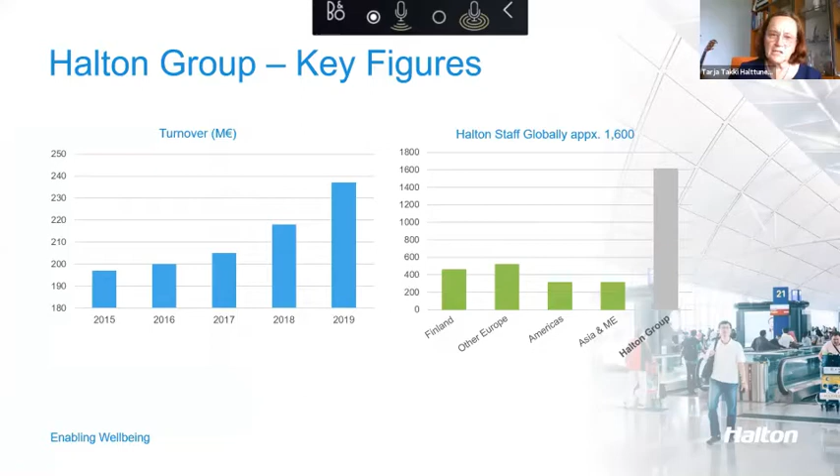Okay, well, thank you very much indeed. In fact, this book, Breathe In, is a great book, and I was so delighted. I was honored to be invited to your 50th anniversary, and you have a wonderful director here who is also a member of our board, the Turkey Finland Business Council board, Mr. Onur Çakır. So he passed the invitations to me, and I was so happy to get this book and all the photos and everything, and that great events and the rock concert by Mika.

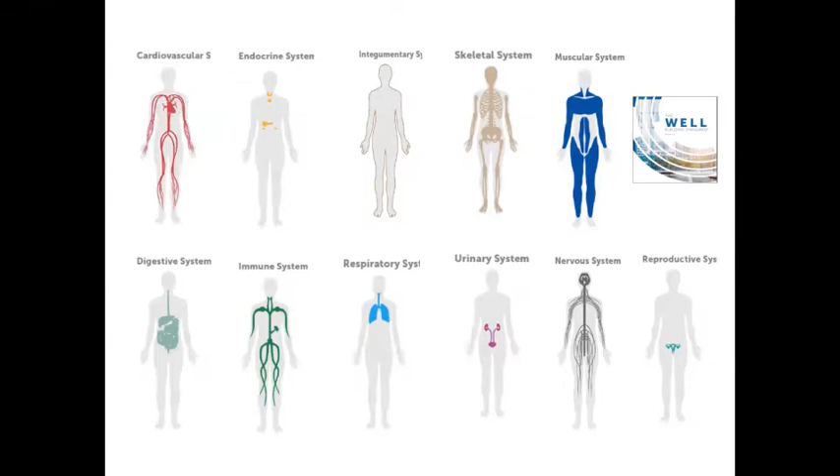For those of you who haven't looked at the WELL standard, you can download it from the web. They've basically taken each of the human circulatory system, the respiratory system, the muscular system, and talked about how we have to design indoor environments for each of those systems. Of course, COVID is addressing some of those systems - it has the most significant impact on the respiratory system, but unfortunately it seems to be having an impact on many more systems, which is what makes it such a scary time.

I'm an educator and a researcher, and I spend a lot of time doing public speaking to the design community and the building management community. So I'm always trying to turn this into prioritized guidelines - what do we have to do, and in what order?

If you look at human health response indoors, probably the most critical thing we can do is do a better job of delivering fresh air. Beyond that is eliminating toxicity in materials, because indoor air quality is a function of what we bring into or have in the building. We have to now start treating water as a design material, because water can bring in toxicity or create Legionella.

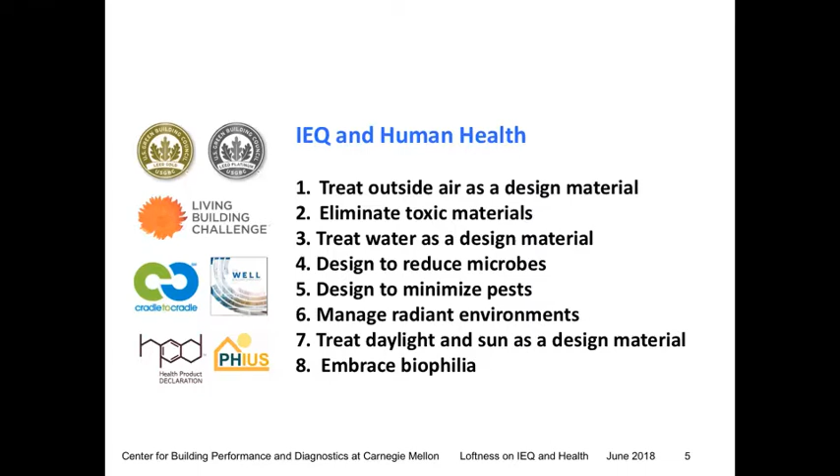We're looking at ways to reduce microbes, which COVID is one of the microbial concerns, designing to minimize pests, managing radiant environments, and then treating daylight and sun as a design material, because it's actually a healing and sterilization opportunity, and embracing biophilia. I'll end with that at the end of the talk.

This is the most important thing we have to do, and it's fitting that Halton is the sponsor for this talk, because delivering outside air to the occupants is critical. It means we have to design our ventilation systems to be effective. As an American who watches American mechanical solutions show up all over the world, variable air volume systems, the whole idea of delivering cooling and breathing air together is a terrible idea. You have to deliver breathing air separate from cooling.

Ideally you do water-based cooling, because it's a far more energy efficient and quieter solution. But if you're going to do air-based cooling, do a dual duct system and deliver your breathing air independently, because less than 10% of the air we blow around buildings in a VAV system is breathing air - 90% of it is just cooling air, just recirculated air, and it's fraught with problems, even if we do ultraviolet and other kinds of filtration.

We're going to have to increase the amount of outside air. We really should be using economizers with heat recovery, and increase it as much as we can. If it's a beautiful day today in Istanbul, we should be increasing the amount of fresh air we're bringing in, instead of bringing in the same 10% and then trying to heat it, cool it, filter it, and dehumidify it.

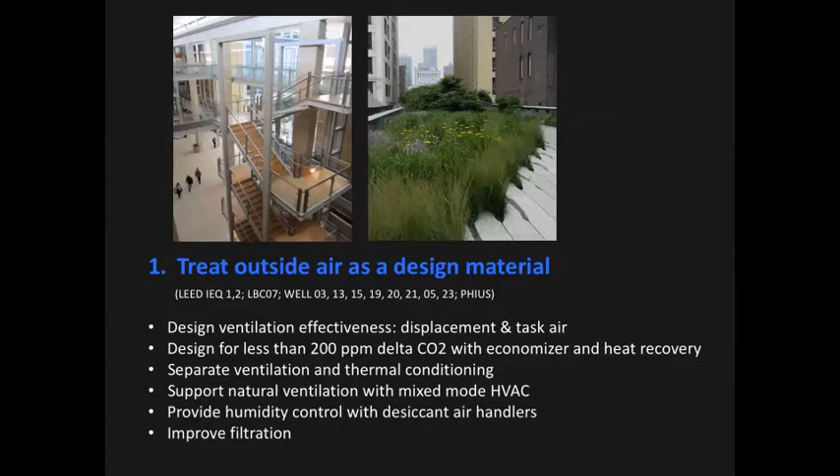Of course, air comes with problems. We're going to have to filter it, and we're going to have to deal with the humidity issues. There is research that really argues for why we need to increase the amount of outside air to make sure we deliver it effectively. These are the kinds of studies that our research team at Carnegie Mellon have been focusing on, finding the medical and scientific research that links better buildings to better health outcomes.

This is a study of colds in offices, and what they found is that there was a 6.8% reduction in cold incidences in offices that had CO2 differential less than 100 parts per million higher than outside. In other words, the closer you can get your indoor CO2 to outdoor CO2, the better the indication of ventilation quality.

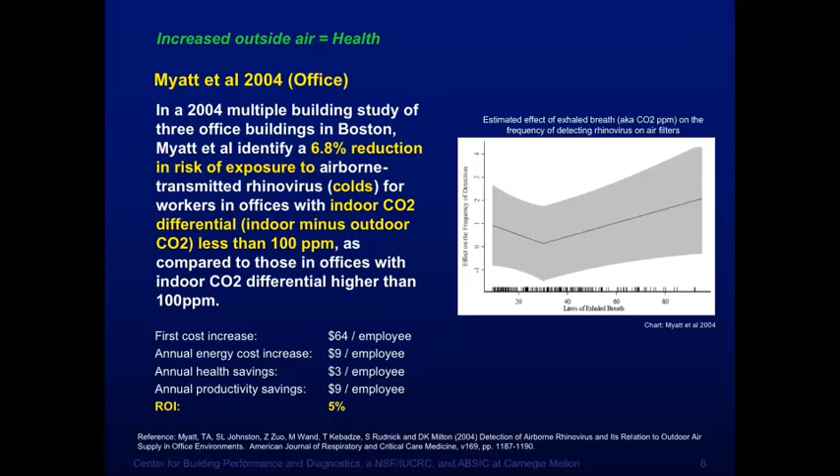Another study in Sweden looked at asthma, and found a huge 69% reduction in 2-year incidences of asthma among school children when they were given a displacement ventilation system, which is a far more effective delivery of fresh air with increased fresh air supply compared to the traditional ceiling-based VAV system. Classroom studies in Scandinavia have consistently shown that the quality of the mechanical system and the delivery of fresh air is extremely important. A 69% reduction in asthma in school children is a huge contribution to the health of the next generation.

The second big issue for me is to keep windows operable. Now, I know there's a reason why schools in America have been slowly but surely replacing old windows with new sealed windows. They do that because they're worried about security, outdoor air quality, and outdoor noise. But in reality, the outdoor air quality is almost always better than the indoor air quality.

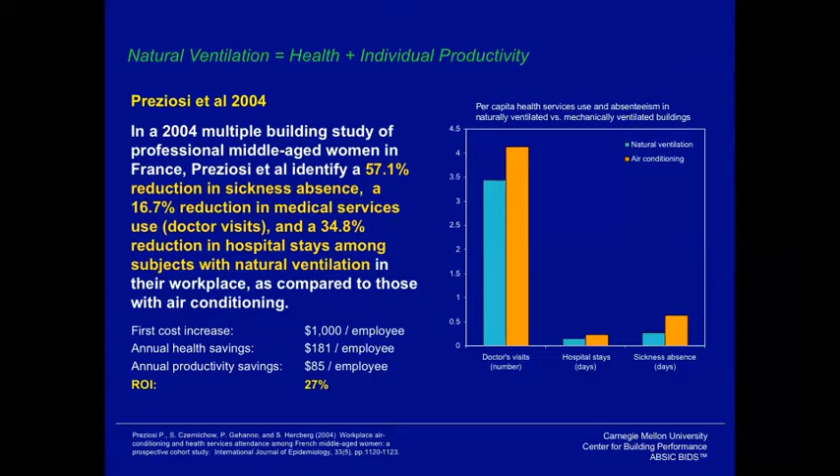Again, the research is with us. A study in France by Preziosi found a 57% reduction in absenteeism, a 16% reduction in doctor visits, and a 35% reduction in hospital length of stay among female workers in office buildings with windows that opened, compared to female workers in office buildings with mechanical systems. A lot of it has to do with concerns that could arise from a mechanical system that's inadequately maintained or badly filtered. But there's something about outside air that we haven't quite teased out that we need to re-embrace.

The next issue is to eliminate toxic materials. Nothing could be more important, after increasing the breathing air content, than making sure that what we put inside buildings is not toxic. There is, in Europe, a move to establish the precautionary principle, which basically says if we don't know whether it's healthy, we probably should not use it. If we know it's healthy, we can go ahead and use it.

In America, with the Living Building Challenge, they've created something called the Red List, a series of products they say don't put in buildings—they're fraught with health problems, they're endocrine disruptors. There are also health product declarations, so now we're starting to see labels on materials and products that declare they've actually been tested to be healthy. This has to do with our respiratory system, our eyes, our skin.

There are so many elements around us that actually diminish our health over time. The biggest ones being adhesives and sealants, paints and coatings, flooring materials, composite woods—because many composite woods are created with formaldehyde and creosote—and fabrics, because of the flame retardants put into them.

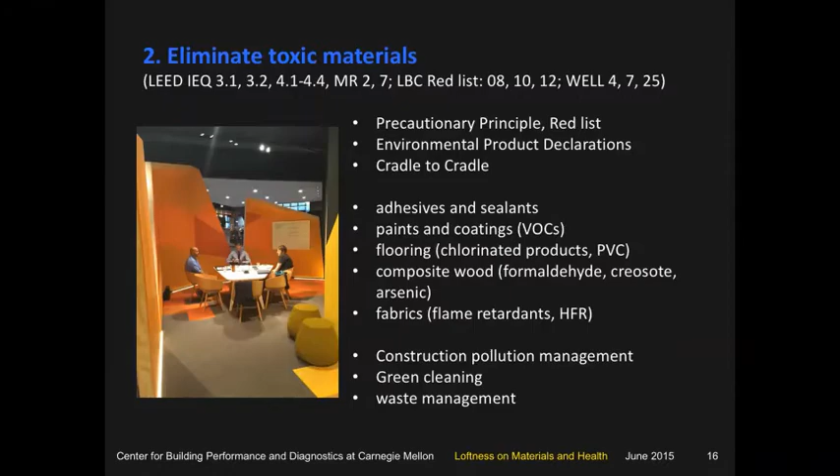And then over time, we add pollutants. We have construction pollution, non-green cleaning pollution, and other types of waste management in buildings. The research is growing in this area, in this case regarding formaldehyde in composite wood products.

A study done in Australia found a 60% reduction in the prevalence of asthma among children in households that had formaldehyde-free composite wood products. These are the products in your kitchen cupboards, in your couch frames, and we have choices when we go shopping—to buy composite wood made with formaldehyde or other toxic bonding agents, or to make sure we only buy products that are formaldehyde-free.

And of course, sometimes they replace formaldehyde with other toxins. So what you're really looking for are environmental product declarations that basically say everything in this chair is a healthy product. Many manufacturers are beginning to pursue labels showing the entire product is healthy and has been tested. This shows a 60% reduction in asthma for kids in households where parents have chosen formaldehyde-free composite wood products—again, a huge impact.

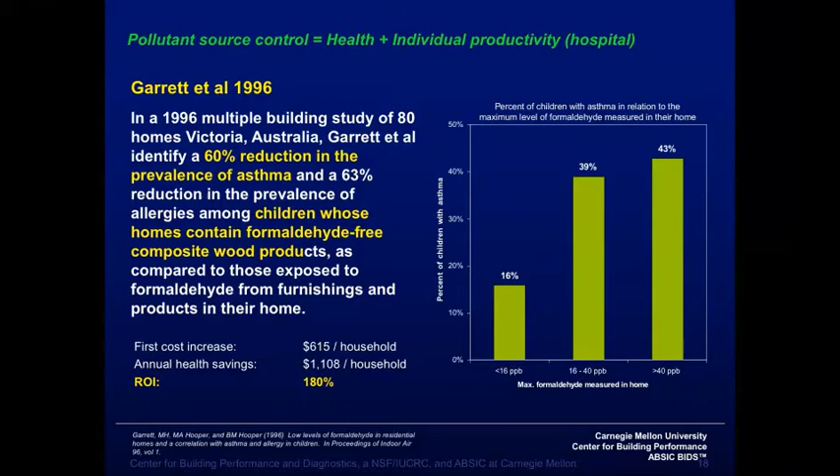A very different study on productivity and indoor air comes from the Technical University of Denmark, one of the leading research groups on indoor air—actually the founder, Ole Fanger, of the thermal comfort standards and air quality standards we all work with around the world. In this study, Wargocki identified a 6.5% improvement in typing performance and almost a 50% reduction in sick building symptoms when indoor air from old carpet was taken out of the airstream.

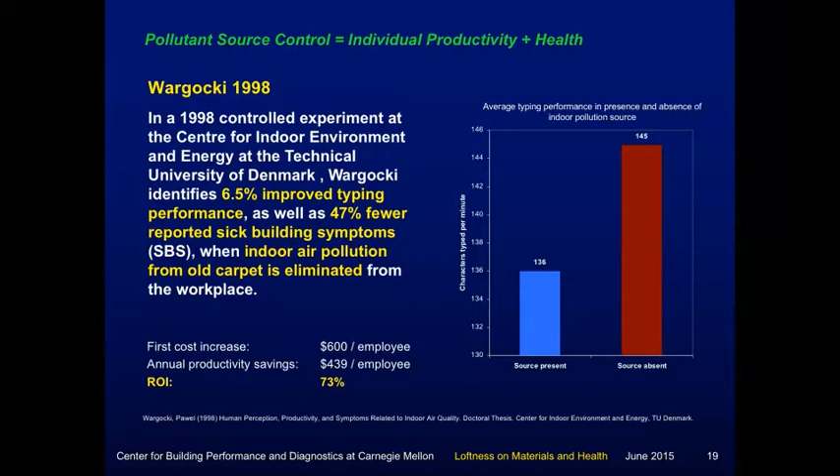It was a very unusual test where they introduced actually dirty carpet into the airstream, hidden from the occupants, and measured performance on a series of repetitive typing-related tasks. They found a compromised performance, and the occupants also sensed that the indoor air was compromised. They never found out exactly what toxin was in the old carpet—they only identified that when it was put in the airstream, it compromised health and performance.

As I mentioned, the Living Building Challenge has established a Red List. As you can imagine, manufacturers are not thrilled to have independent bodies like Delos, with the WELL standard, and the Living Building Challenge, creating a Declare label, because it makes it tougher for them to manufacture products. But we have to be partners in making sure the manufacturing community eliminates the toxic components and replaces them with things known to be healthy.

Another group that's been extremely valuable in pushing a new generation of products is the Cradle to Cradle initiative—this is Bill McDonough and Michael Braungart's work. They've published the books Cradle to Cradle and now Upcycle, and they've created a public repository of high-performance materials and products for all of us designers and engineers.

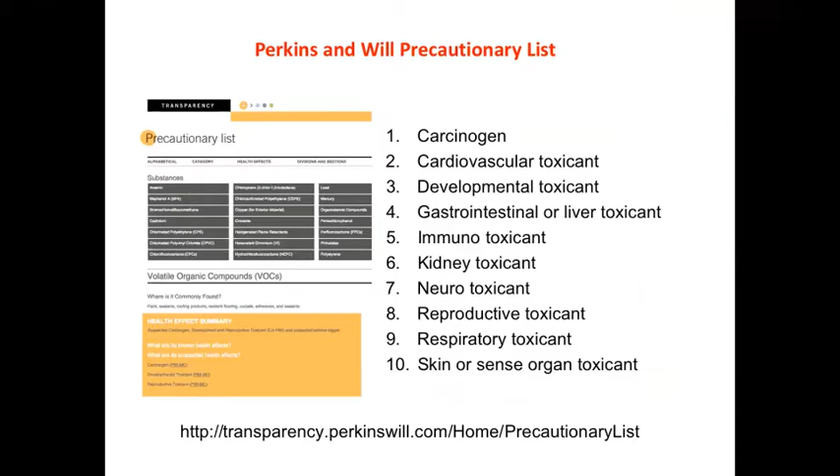The design community, like Perkins and Will, one of the largest firms in the US, has created their own precautionary list of things they are eliminating, to ensure they've done the best professional job, and also to be more competitive because people know they care and are on top of what are healthy products. We are looking for things that don't irritate the skin, that don't outgas toxins, that don't degenerate into respirable fibers.

All of you remember the asbestos generation, and we may now be generating other forms of asbestos which we have to be on top of. We need materials that don't create fire hazards, don't foster mold or mildew, or transfer viral infections, and that also have low embodied energy in the building and the materials themselves.

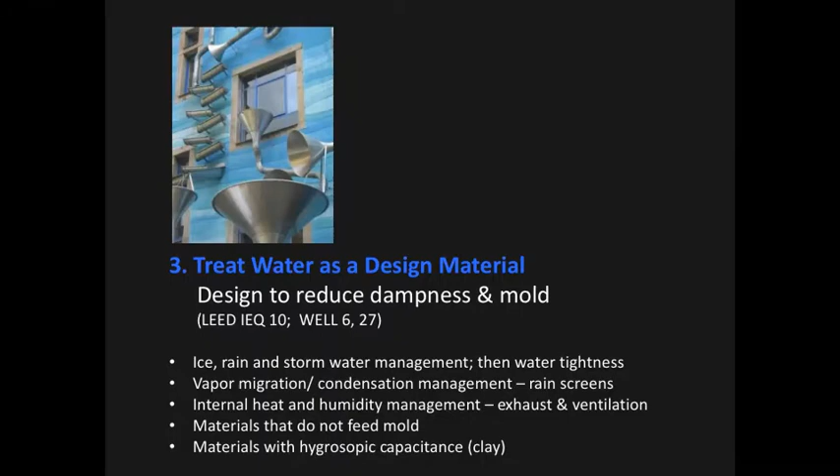The third thing we need to do for indoor environments and health is start treating water as a design material. A lot of our health concerns, especially in rainy areas and areas with lots of air conditioning, relate to mold. When we super cool indoor environments and generate humidity, we often get condensation on surfaces, and where there's condensation you'll find mold growth, especially if the air has adequate humidity to support it. Mold has a significant correlation to both asthma and respiratory concerns. So we really want to start treating water as a design material and recognize that humidity and rain are an integral part of our indoor design portfolio.

This is Jack Spengler, one of the leading researchers at Harvard University's School of Public Health. He spends quite a bit of time out in buildings trying to understand both what causes mold and what impacts it has on human health. Here you can see what happens in a flood.

Unfortunately, drywall, which we use extensively, is a pretty good mold supporter—it lives on the paper coating on drywall. It turns out that plaster, literally original clay plaster, is hygroscopic, whereas drywall is hydrophobic. With clay plaster, a lot of this problem would not have happened. So maybe we need to rethink and re-embrace plaster.

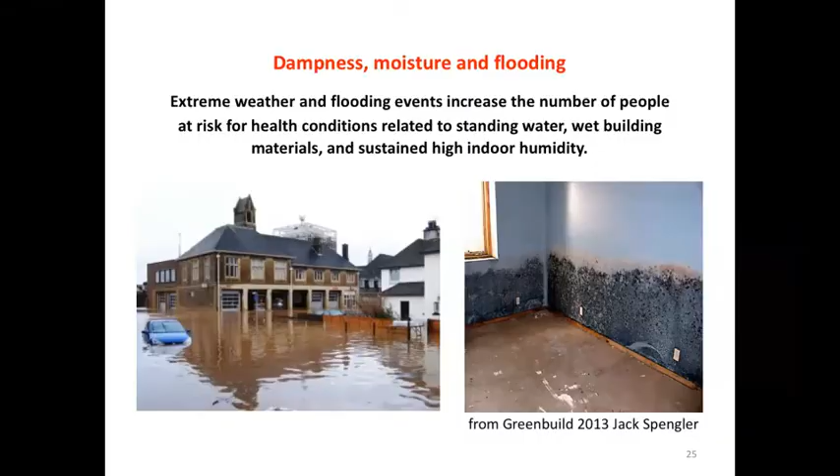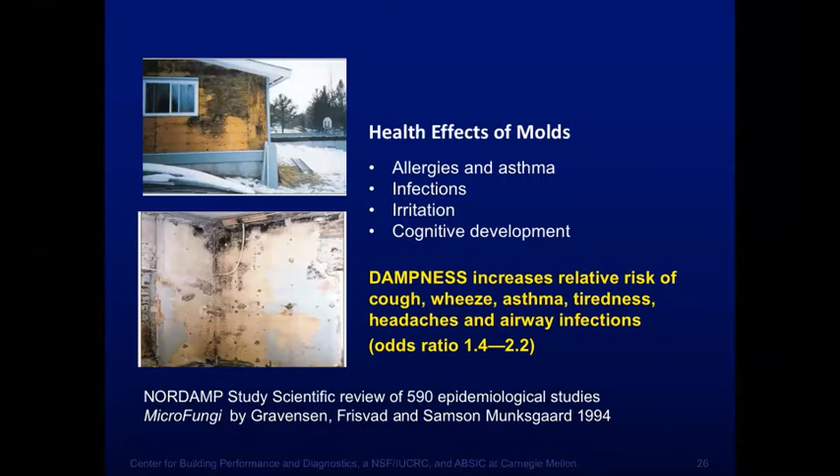As I mentioned, mold has a direct correlation with allergies and asthma. It's also strongly correlated to infections and to cognitive development. The work going on in mold research around the world is making it clear that we have got to treat water as a design material. Here's just a stretch of research around the world on this.

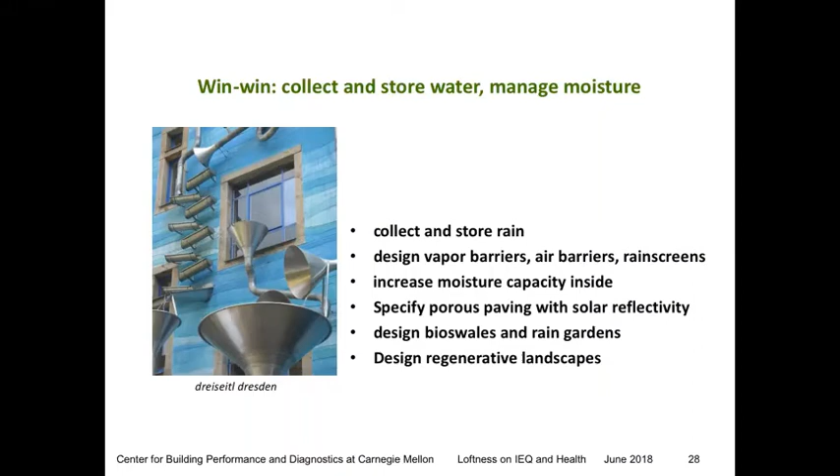It's a win-win for those of us in the design community if we start to treat rain and humidity as a positive thing. We collect and store our rain, design vapor barriers independently of air barriers, use rain screens, increase moisture capacity with hygroscopic materials, specify porous paving, design rain gardens, and design regenerative landscapes. All of this is actually a very rich arena for us in the design community if we start treating water as a design material. This is what you start to see.

This is Portland on the top slide—those are all rain gardens. They've turned their sidewalk into a huge repository for heavy rain. In a deluge, the reason for those little slots in the concrete is that without them, water on the pavement would just pool there. But with those slots, it goes into this green bed, which is very deep and has significant design capacity to hold rainwater and then slowly leach it back into the aquifer.

Pervious paving versus impervious paving—all of this is well within our keeping. At this point, cities in Europe are, in many cases, as much as 85% hard impervious surface. Between the roofs, the streets, the sidewalks, the parking lots, 85% of our cities are solid. No wonder we're dealing with water challenges.

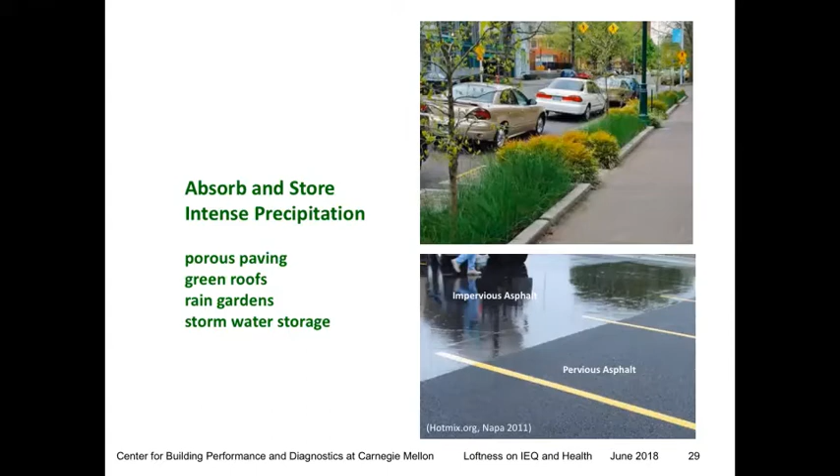This is the work of Herbert Dreiseitl, a German water designer—the leading water designer, truthfully, in the world, doing projects all over the world. He basically says we can design landscapes that will absolutely absorb a deluge and respond to drought. This is just a side yard in a European housing community, and it's a play area for children. It's exploratory, and yet it can handle the worst that nature can throw at it.

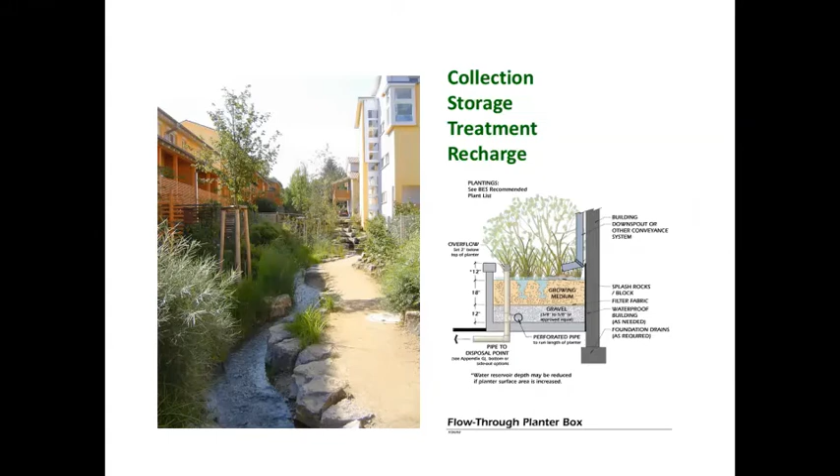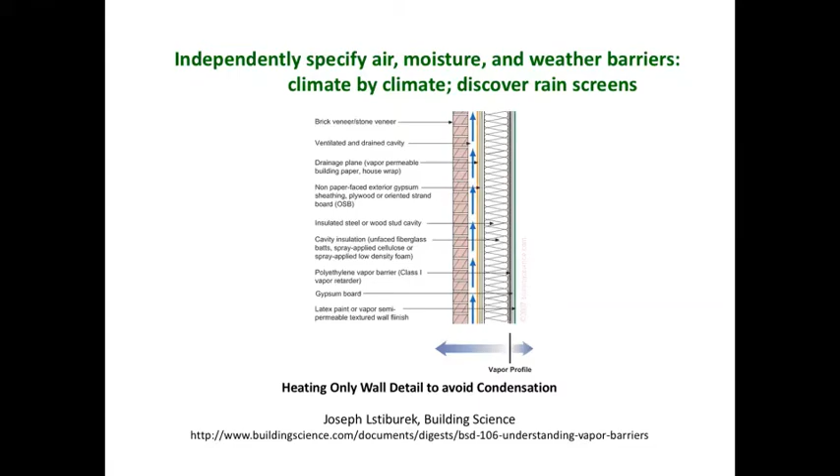It's not easy to design for hygroscopic and moisture migration in walls. We have a real challenge, and I actually don't know how to teach wall design. It gets harder rather than easier, just trying to deal with where we should actually have the vapor plane, and every climate is different. So we really have to spend time learning and testing different wall constructions for moisture migration.

Rain screens are magical. If you haven't been designing with rain screens, I fundamentally believe all future buildings should have a full layer that just deals with the brunt of the sun and the deluge rain, and then a vent space behind it. These are breathing walls—Renzo Piano has been one of the earliest adopters of rain screen. Now many architects are designing with rain screens, and projects all over the world use them. They age beautifully because these facades breathe. They're not sealed or silicone caulked, and they can go through expansion and contraction. They can take the deluge, driving rain, and then they dry out, and the space behind it is completely separate from the actual wall of our space.

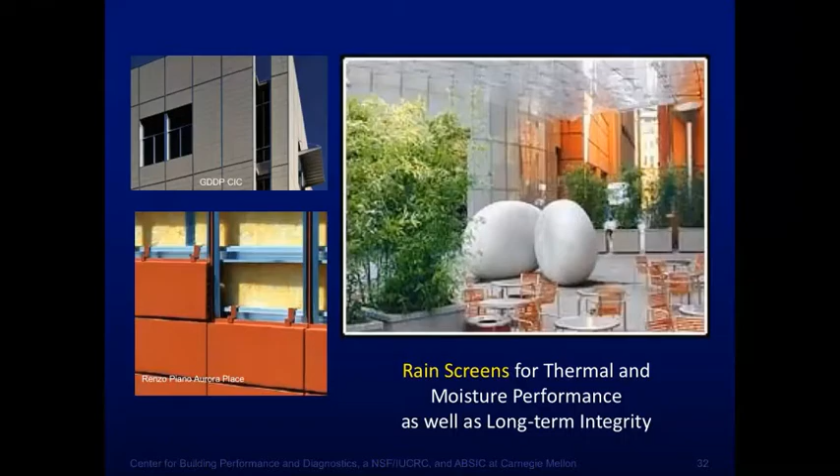Designing to minimize pests and to reduce microbes are two things that go hand in hand. Minimizing pests, we could start by redesigning our front doors. To reduce pests, we can do integrated pest management. Designing to reduce microbes has a lot to do with learning ways to clean and using hands-free design.

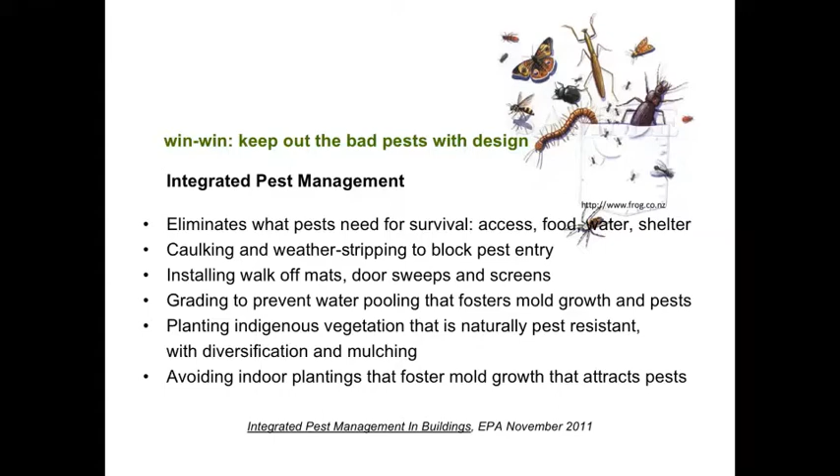Integrated pest management is an entire menu of activities. Probably the most critical activity is catching things on their way in. You actually need 3 layers in your front door: a scraper that picks up heavy dirt, a wiper that allows you to get water off of it, and a finisher. So you're literally designing for 3 layers of cleanup on everyone's feet.

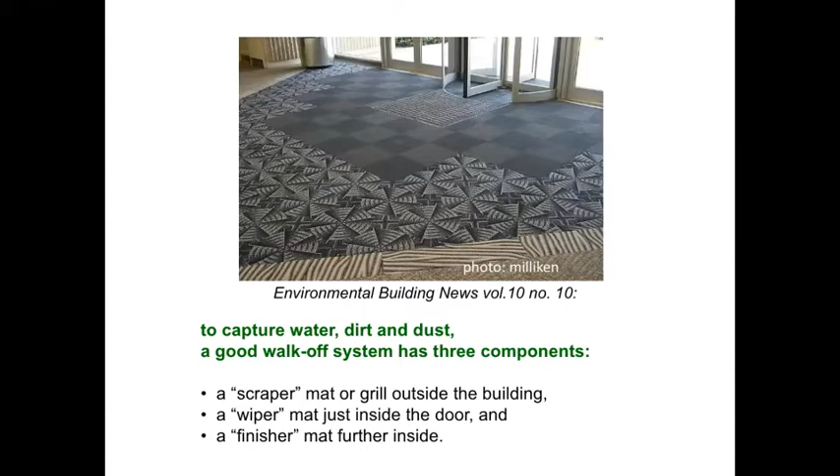Many Asian cultures have people take their shoes off as they enter the building, and it may actually be critical for human health for all of us to take our shoes off when we enter buildings. Not a very Western activity, or certainly not a very American one, but something I think we're all beginning to realize is important.

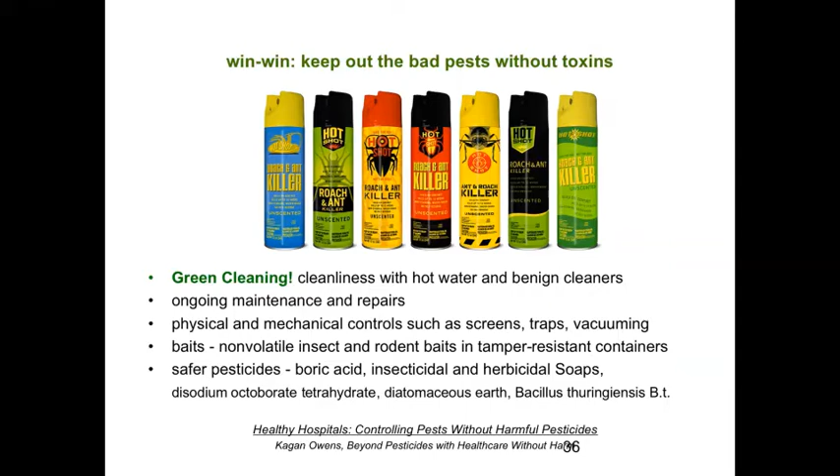Cleaning - there are so many toxic materials out there, used for pest management as well as things to clean surfaces. In the US, over 75% of households and businesses use all kinds of toxins.

Jack Spengler has been going into hospitals and taking everything out of their cleaning cupboard. He says a lot of the stuff in there is dated from 1994, meaning it's been in that cupboard for 25 or 30 years, or even longer. Most of it is filled with some of the most toxic things, and this is in hospitals. He'll take everything out of the cupboard, identify the 3 things in the entire suite that you can actually use, and say everything else has to be disposed of appropriately. He says it's so problematic what we're doing in cleaning our buildings.

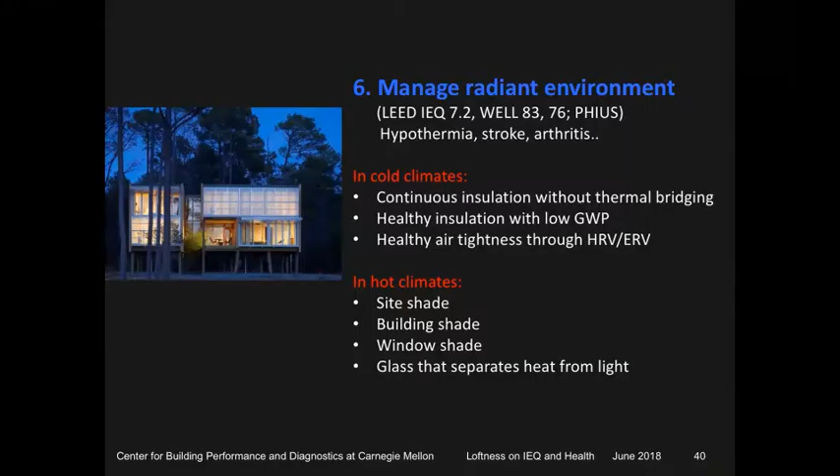Managing the radiant environment is more of a cold climate problem, although because we are beginning to super air condition in hot climates, it's becoming a hot climate problem too. Let me briefly talk about the passive house. It needs to be absolutely climate appropriate - you should not be doing a European or Scandinavian passive house in Turkey. You should be dealing with passive house solutions suited to that climate.

If we can design airtight and well-insulated building envelopes, we can guarantee that the interior surfaces are at a uniform temperature, different from the outside surfaces. If we don't do that, what we end up with is called thermal bridging.

This is the Wave building in Chicago by Jeanne Gang. I know for a fact that the original proposal by Jeanne Gang was to introduce thermal breaks, shown on the bottom right, from a company called Schöck out of Germany. They basically take concrete that's exposed inside the building and break it. We always cantilever our floor slabs out to become balconies, but unfortunately, in that cantilever, we've created a thermal bridge.

If I air condition my apartment and there's moisture in the apartment, I'll end up having condensation on the inner walls. So it's very important to break the connection between the indoor and outdoor environment and make it airtight. These thermal breaks are critical to doing that.

Unfortunately, it was a $1 million upcharge for the Wave building. The developer said no, I'm not spending that $1 million, so they did not install thermal breaks. Today, when you take a thermographic photograph of the Wave building, you'll see thermal bridging rampant, because all of those concrete waves are interior floor slabs that have been penetrated through the facade and taken into the outdoors.

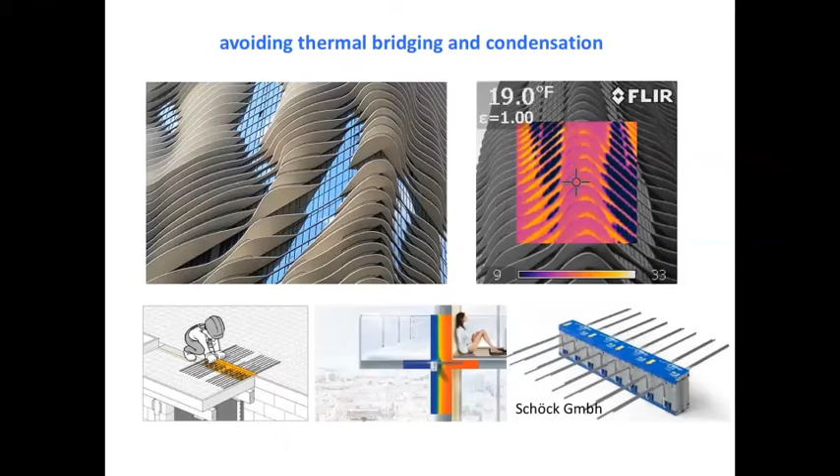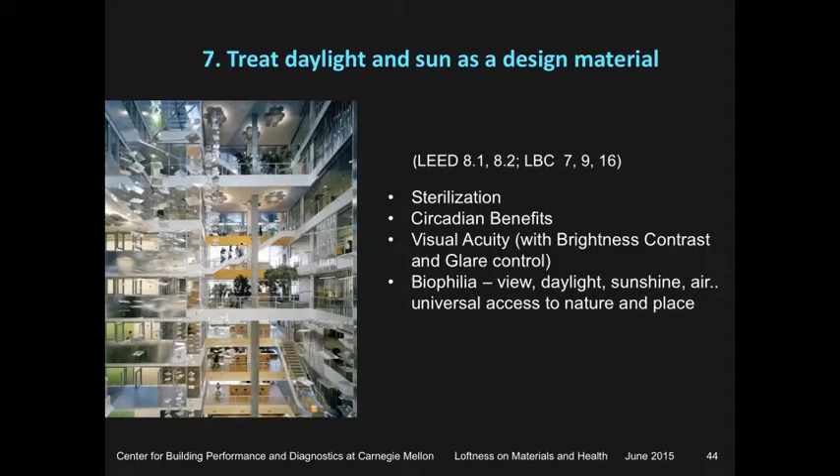We really need to design to break thermal bridge. Treat daylight and sun as a material. Daylight and sunshine are sterilizers. They have significant circadian benefits. They also provide people with views and biophilic content. So daylight is a pretty magical thing. There is research on this, looking at length of stay in hospitals.

If any of you end up in a hospital, please ask for an eastern or a southeastern room if possible, because it turns out that length of stay is dramatically reduced for people who are in the southeast versus those who are in the northwest. The amount of pain medication is reduced. The nurse calls are reduced. Something about early morning sunshine is important to our recovery.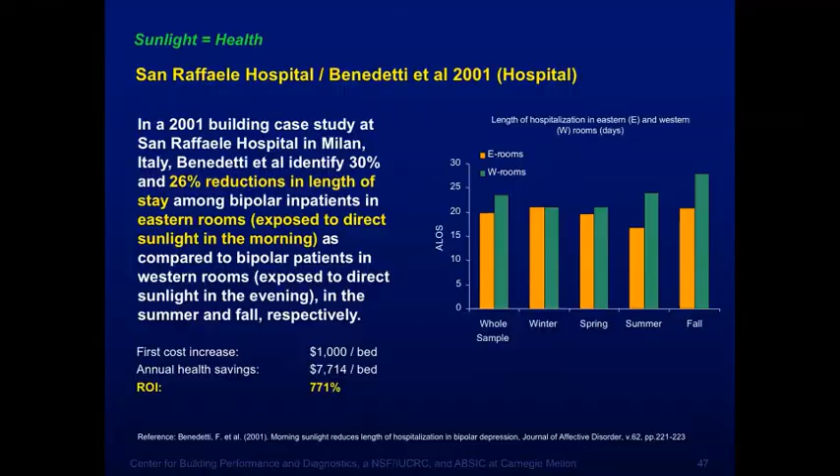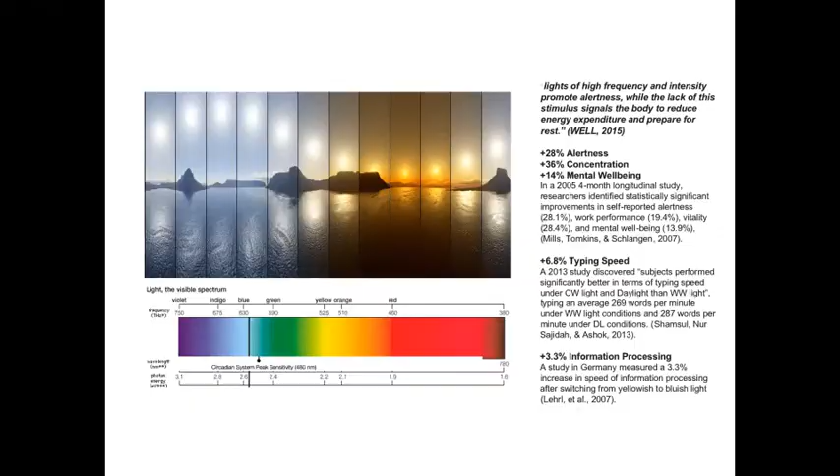The research on circadian light is growing. It turns out that the blue light we're used to from daylight in the morning creates serotonin, which suppresses melatonin, and the red light we're used to outdoors in the afternoon creates melatonin, which helps us fall asleep. If we don't get the blue and red content every day by spending time outdoors, you end up losing your sleep. Research is showing that if children are not exposed to early morning light, they will fall asleep 30 minutes to an hour later than their peers who do get exposed to early morning light, and then it will be hard to get them up the next morning. It will be hard for them to learn the next day. So there's some very good research, this by the Lighting Research Center at RPI.

And then lastly, biophilia. Once we start to embrace light and sunshine and natural ventilation, we also get all the other contents that are very important: the sounds of nature, the sensory quality of nature, the community, listening to community and children playing, the ability to increase our access to the natural environment and creating good natural environments, which we can do if we do rain gardens and regenerative landscapes, so that kids can run indoors and outdoors, and those of us now trapped with COVID inside can directly access and view beautiful outdoor spaces.

There's good research that's growing on the value of biophilia. You can download the 14 patterns of biophilia from Terrapin, and they will give you the research. In this case, there's 6 to 7% faster average handling time for call center workers when they have seated views of nature, compared to those workers who are in cubicles without any view at all. And that's a lot, 6 to 7% straight increases in productivity for call centers. It actually will justify the thinner building and the access to windows for call center employees, even though they're not very well paid in the US. You would actually make money if you would design more humane environments for your call center workers.

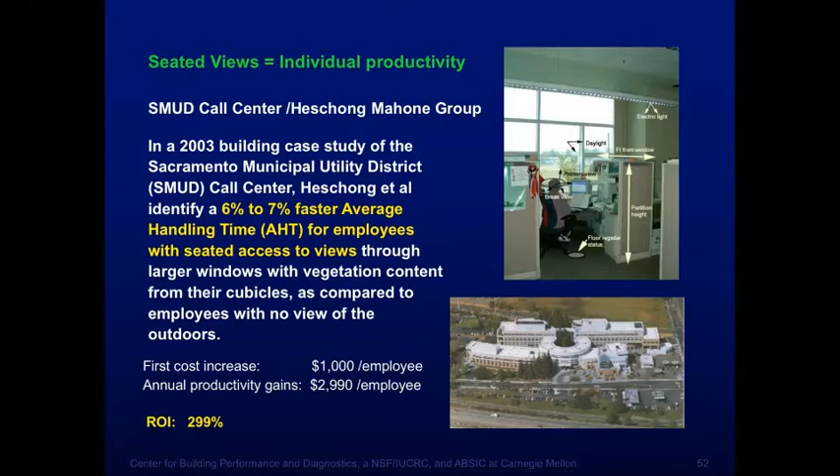For children, it turns out that providing outdoor learning environments has a significant impact on their performance at standardized tests, and making those environments actually rich with diverse natural content makes them perform the best.

So this is where I work, although not right now. In fact, it probably looks pretty clean because no one has been in this building for the last three months. This is the Intelligent Workplace at Carnegie Mellon University, where I have the privilege of working for the last 20-some years since I stepped down as head of the School of Architecture, or 15 years. And it's a wonderful daylit, naturally ventilated work environment that's very low energy and very high indoor quality. Thank you so much.

Am I? Vivian, thank you so much. That was most impressive. Oh my goodness. And you are right on time, right on time. That was breathtakingly beautiful, your presentation, and an eye-opener. I'm sure we've got, by the way, now 119 participants, okay? We probably hit close to maybe over 150, because right now it's 120, actually, exactly. So this is a great turnout, and I'm sure everybody is delighted and excited about what you've been telling.

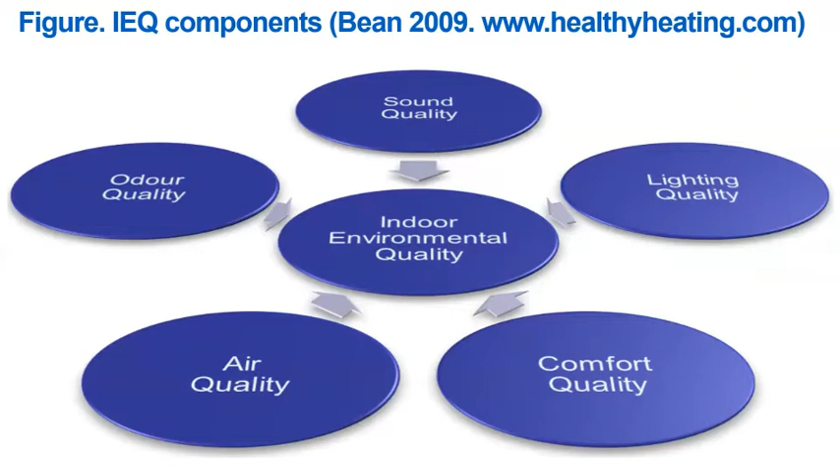So the title of my presentation today is Impacts of Indoor Environment and Air Quality on Human Health and Performance. This figure shows indoor environmental quality components published in 2009, including sound quality, lighting quality, comfort quality, air quality, and odor quality. Later, in 2019, Mujeebu published this figure. As we notice, in addition to air quality, sound quality, odor, lighting comfort, and thermal comfort, there are also factors like water quality, vibration, electromagnetic radiation, hygiene, microorganisms, and ergonomics. So all those factors affect indoor environment quality. In my presentation, I concentrate on indoor air quality.

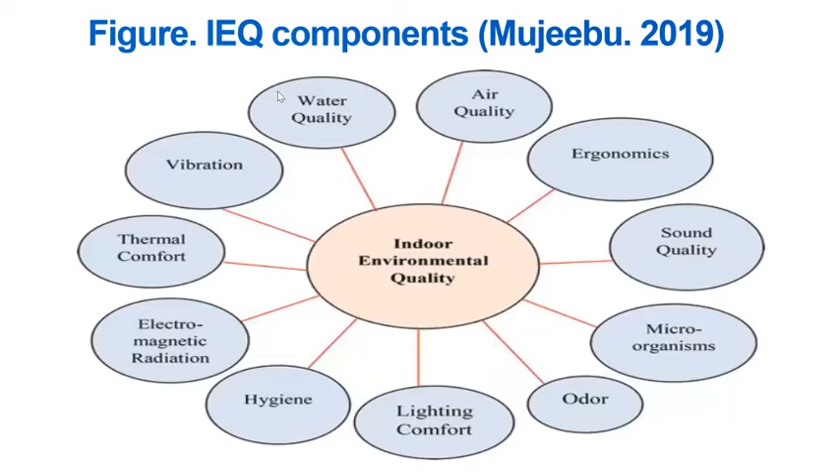I list here some facts about why indoor air quality is so important. Each day we consume on average 10,800 liters of air, and we spend about 90%, even more, of our time indoors. It's published that air pollution causes globally 7 million deaths each year, so it's a huge amount. Indoor air is on average 2 to 5 times as polluted as outdoor air—in some houses, even 100 times as polluted.

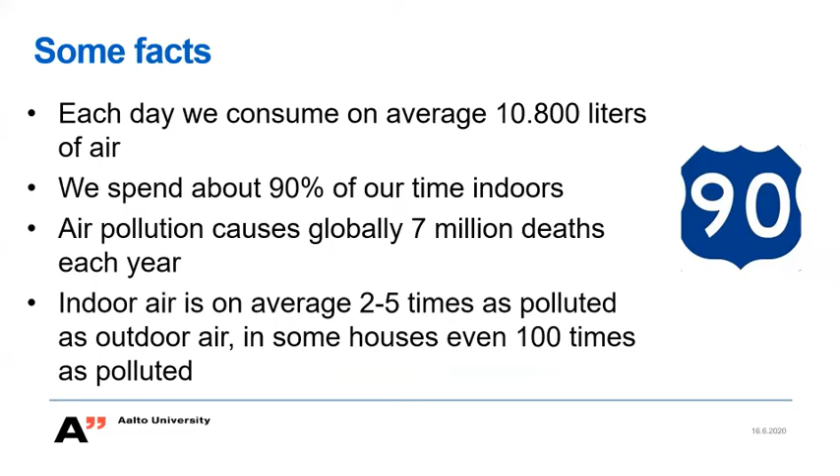I would like to start with this short video. Hopefully you can hear this voice.

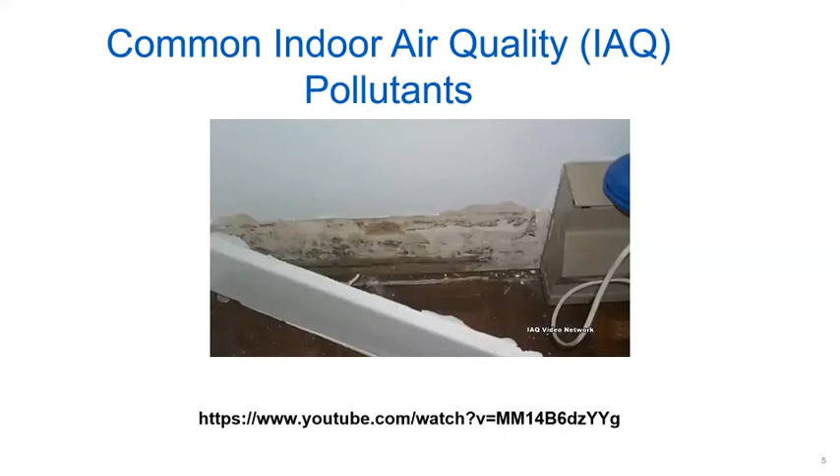In today's world, most people spend the majority of their time indoors—whether at home, school, or at the office. Some experts estimate many of us are indoors up to 90% of the time. This makes the quality of the air we breathe indoors all that much more important. In many homes and buildings, there are numerous potential pollutants that can cause health concerns or even result in various illnesses. They include the following: Mold—in buildings that have suffered water damage or elevated humidity levels, mold can begin to grow in as short as 24 to 48 hours. Mold can cause respiratory issues, allergies, infections, trigger asthma in some people, and expose people to mycotoxins. Bacteria—many types of bacteria can be found on surfaces and even at times in the air we breathe, from Legionella to a growing number of drug-resistant superbugs such as MRSA and C.

Many pose potential health hazards. Allergens: everything from pollen and mold spores to latex and dust mite allergens are frequent contributors to indoor air quality issues.

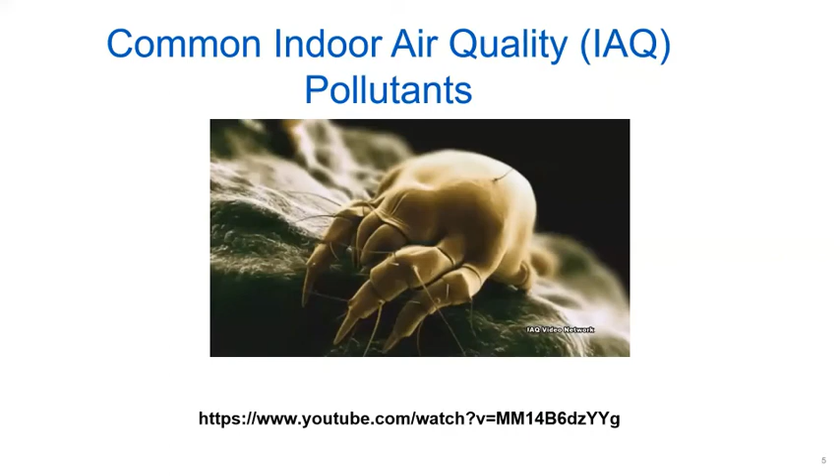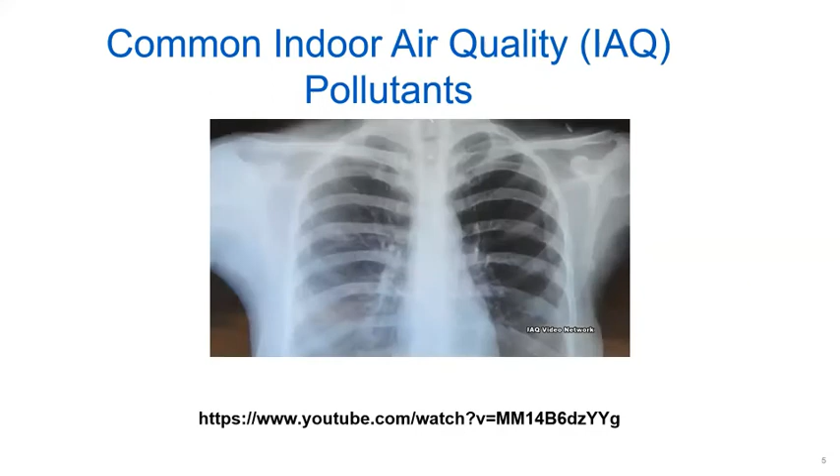Radon: in many parts of the country, radon can be found and is a potential invisible threat. Radon is the second leading cause of lung cancer after smoking and is odorless, colorless, and tasteless.

Formaldehyde and other VOCs: many building materials, furnishings, and products used indoors emit formaldehyde and other volatile organic compounds, commonly referred to as VOCs. VOCs can be emitted as gases from certain solids or liquids, some of which may have short and long-term adverse health effects.

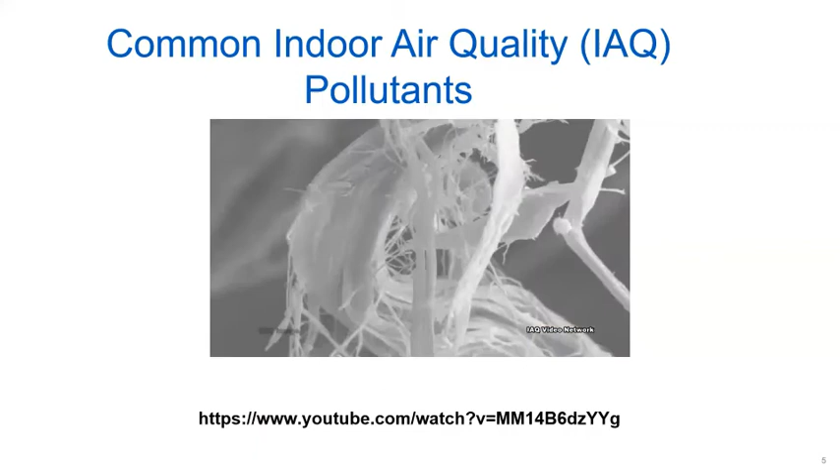Asbestos: asbestos is a type of mineral fiber that was added to many building products in the past to strengthen them and to provide heat insulation and fire resistance. Exposure to asbestos fibers can cause various types of lung cancer, sometimes decades after exposure.

Lead: many buildings built before 1978 contain lead-based paints. As these materials age and degrade, or during renovation, remodeling, and demolition activities, they can become airborne and settle on surfaces, which could put building occupants at risk for lead poisoning. These are just a few things to know about some of the more common issues.

Okay, so as that video shows, indoor air quality is a constantly changing interaction of a complex set of factors, and it's not easy to rank the different individual factors in terms of importance. But we know very well that the main causes of problems with indoor air quality are inadequate ventilation, mold and moisture damages, and material emissions.

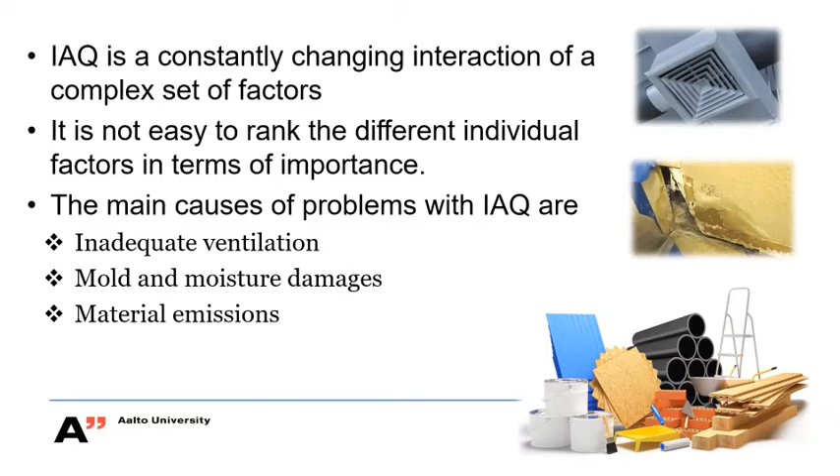And it's well known also that the basis for good indoor air quality are properly functioning and effective ventilation and low emission building materials.

And if you think about the sources of different contaminants, so there are several indoor sources, but also outdoor sources. Most common outdoor sources are traffic and combustion, and indoor sources, for example, people and their activities, tobacco smoke, building and furnishing materials, electronic equipment, cleaning products, and HVAC systems.

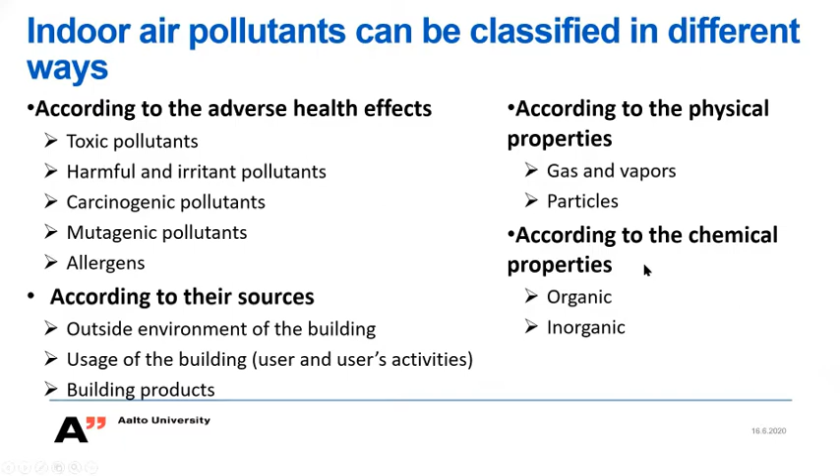And we can classify air pollutants different ways: according to the health effects, according to their sources, according to their physical properties or chemical properties. So different ways to classify. And this table shows common physical, gaseous and particle factors that affect indoor air quality. So as you can see, there are several factors affecting air quality.

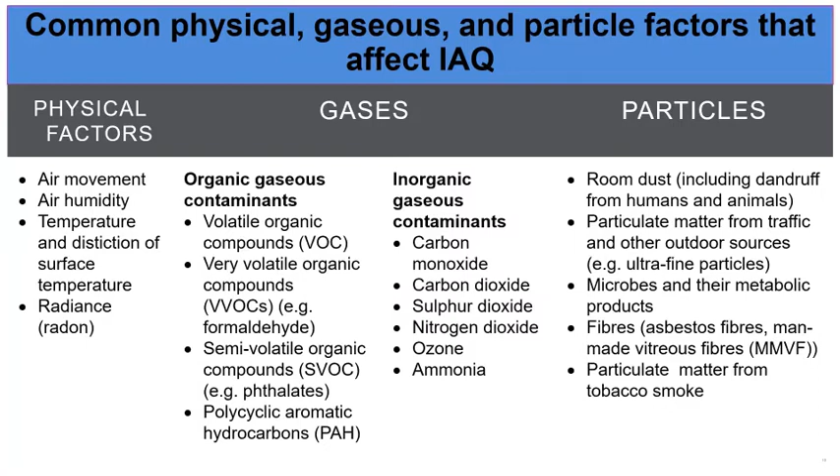And when we think about health impacts of indoor air pollution exposure, children are a particularly vulnerable subgroup because they breathe more air than adults relative to their body size and have greater metabolic activities. And there are several publications publishing those studies.

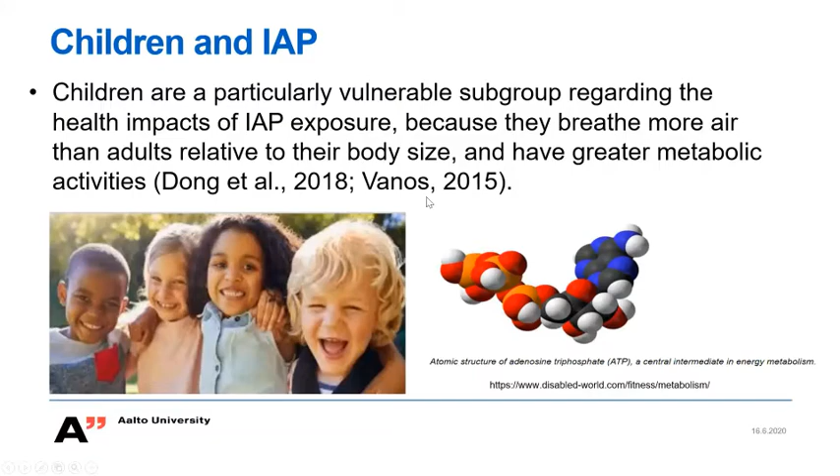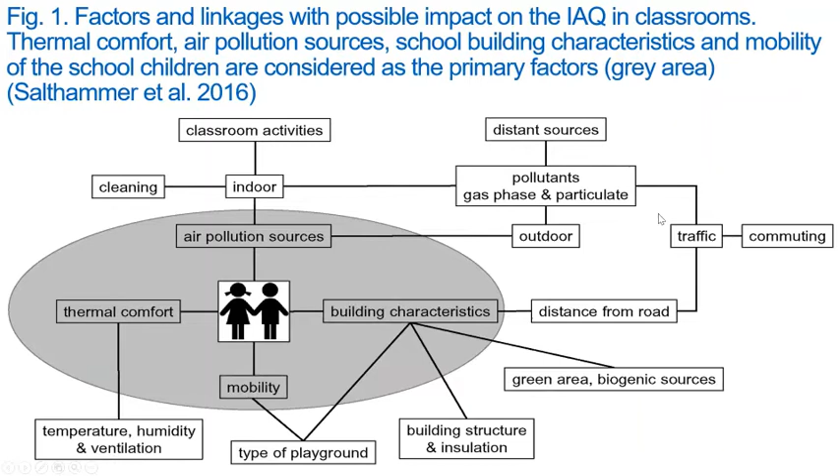And this figure by Salthammer et al. 2016 shows the factors and linkages with possible impact on the indoor air quality in classrooms. And this gray area shows the primary factors affecting the exposure. Those are building characteristics, children's mobility, thermal comfort, and air pollution sources. And this figure shows also the other linkages and factors, but those are the main.

And when we think about indoor air pollution, health effects from indoor air pollutants may be experienced soon after the exposure or even years later.

Immediate health effects such as irritation of the eyes, nose and throat, headaches, dizziness, fatigue, show up very shortly after a single exposure or repeated exposures to a pollutant. Usually those are short-term and treatable, and sometimes the treatment is simply eliminating the person's exposure to the source of the pollution. Soon after exposure to some indoor air pollutants, symptoms of some diseases, such as asthma, may show up, be aggravated or worsened.

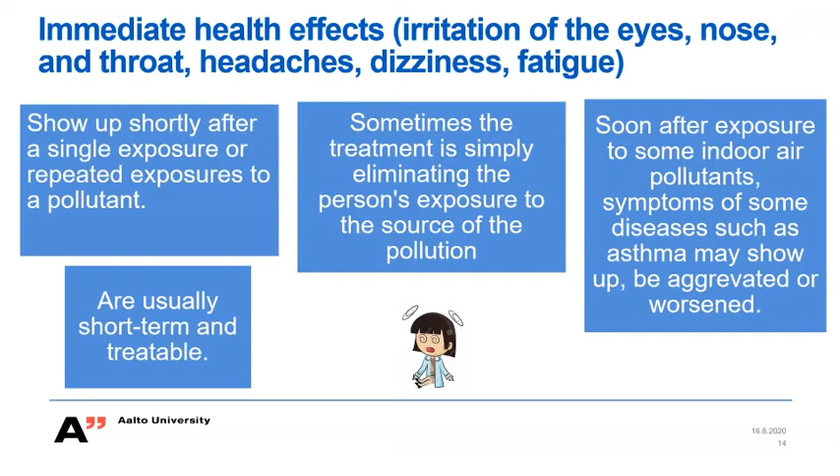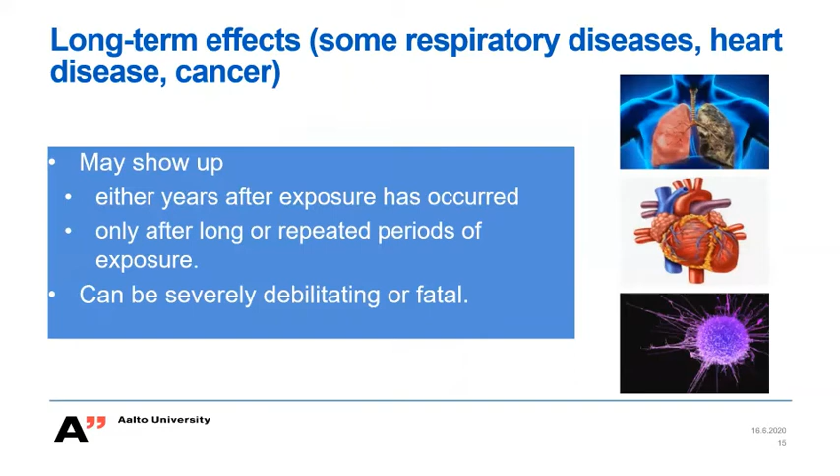And long-term effects such as respiratory diseases, heart disease, and cancer may show up either years after exposure has occurred, only after long or repeated periods of exposure, and can be severely debilitating or even fatal.

And when we check these figures, symptoms and work environment complaints about unpleasant smell, stuffy, bad air, and increased frequency of symptoms from the mucous membranes, such as irritated, stuffy or runny nose, itching, burning, or irritation of the eyes, or hoarse, dry throat, point to pollution in the indoor air.

And it should be noted that it's not possible to decide if gases or particles are involved, but in such a situation, when the figure about symptoms and work environment complaints shows like this, it's advisable to search for moisture problems.

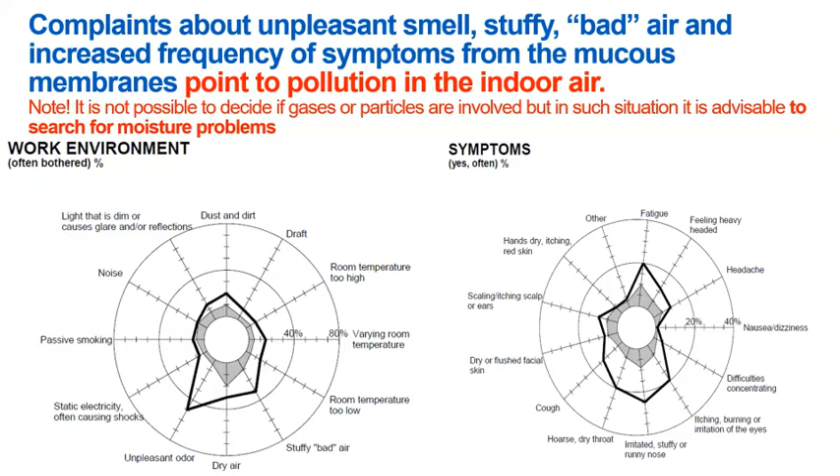This figure shows examples of how climate change may affect indoor environments and health. On the left side, you see outdoor environment conditions that increase with climate change: heat waves, hurricanes, extreme precipitation, sea level rise, flooding, wildfires, outdoor air particles, ozone, and pollens.

You can see the influences on the indoor environment: periods of high temperature, dampness and mold, periods with high concentrations of airborne particles, higher indoor ozone, and higher indoor pollen allergens. The right side shows the potential consequences for comfort and health, and as you can see, there are several consequences.

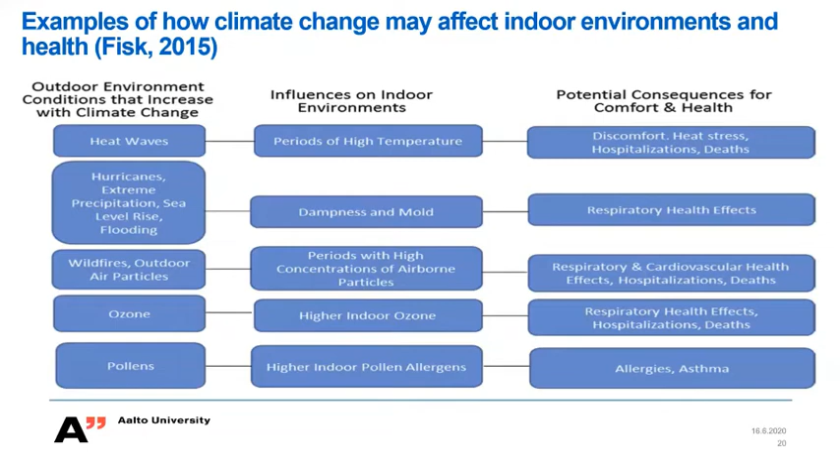As an example about exposure to ozone, I will show some results of our quite recent study on human exposure to ozone in school and office indoor environments.

Ozone is formed by reactions between nitrogen oxides and volatile organic compounds with short atmospheric lifetimes in the presence of sunlight. Outdoor air is the most common source of ozone in indoor air, but there are also indoor sources such as air purifiers, laser printers, and photocopiers.

Regarding health effects: daily exposure to high levels of ozone may cause DNA damage, and long-term exposure to higher concentrations of ozone may be linked to permanent lung damage.

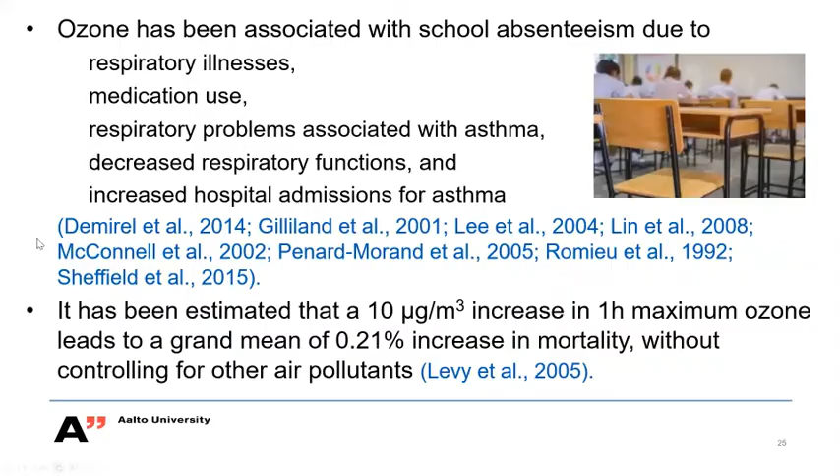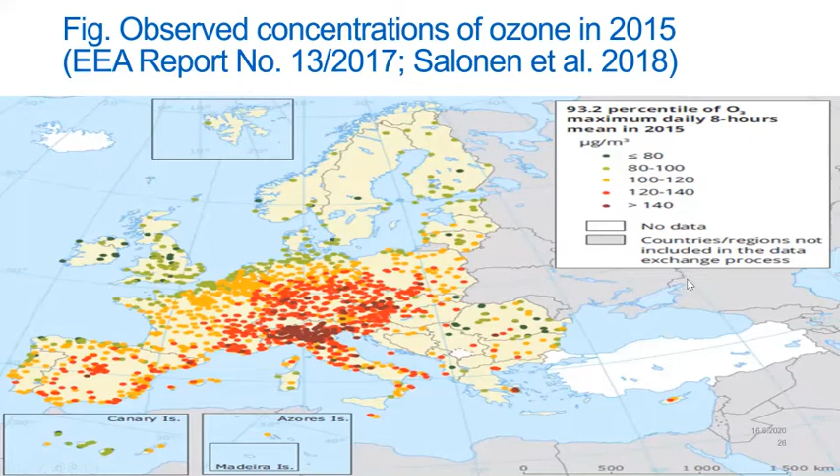This figure shows the observed concentrations of ozone in 2015. Because outdoor air is the main source of indoor air ozone, it's important to also know about outdoor air ozone concentration. As we can see, levels over 140 microgram per cubic meter are very commonly found in Southern Europe, especially in Northern Italy.

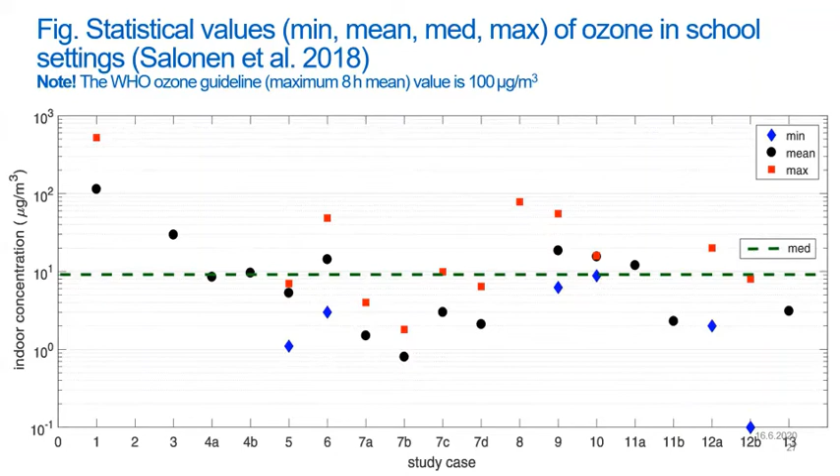This figure shows statistical values of ozone in school settings. As we can see, the median values are at quite a good level, but there are several cases where the WHO's ozone guideline value is exceeded, also in office settings.

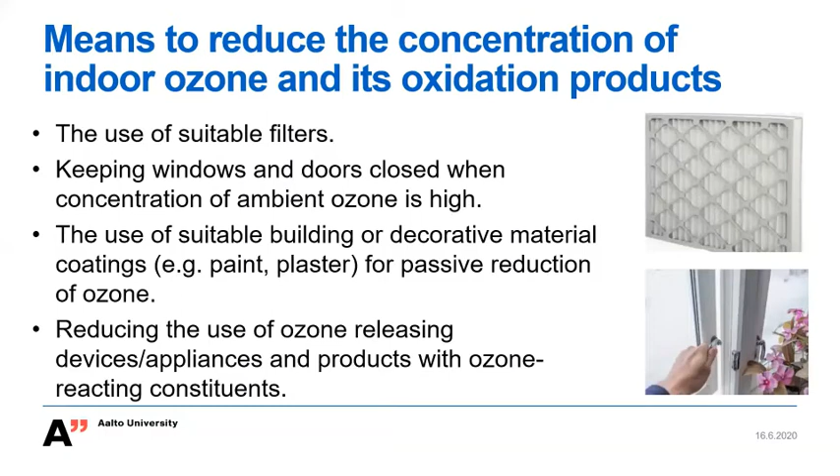When we think about means to reduce the concentration of indoor ozone and its oxidation products, those are: the use of suitable filters; keeping windows and doors closed when ambient ozone concentration is high; the use of suitable building or decorative material coatings for passive reduction of ozone; and reducing the use of ozone-releasing devices, appliances, and products with ozone-reacting constituents.

Quickly, something about my previous and ongoing research projects within this indoor air quality field. I did my own doctoral thesis about indoor air contaminants in office buildings in 2009, which included fungi and bacteria, common VOCs and formaldehyde in Finnish office buildings, airborne concentration of volatile organic compounds, formaldehyde and ammonia in Finnish office buildings, and man-made vitreous fibers in office buildings in the Helsinki area.

After my thesis, I moved with my family to Australia, and there was a catastrophic flood just when I arrived. My first project was to study the flooded houses and the health effects of that flood on occupants. We also did an assessment of exposure to bioaerosols in the school environment as a function of school characteristics after that flood.

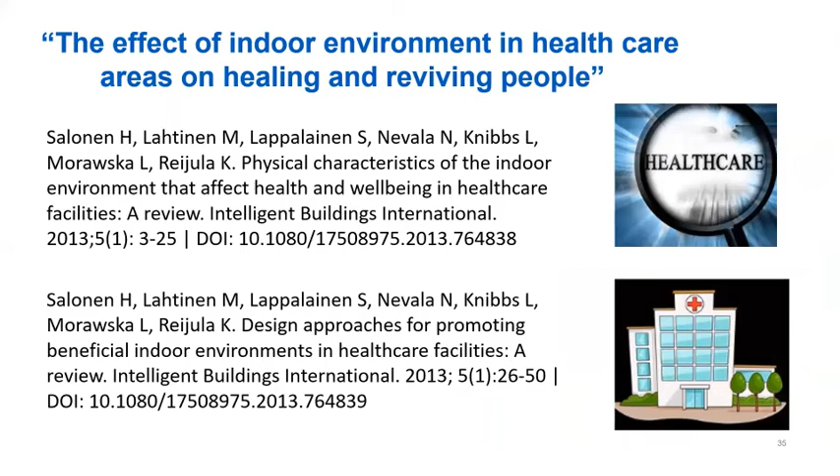This NERO project is going on at this moment, cost reduction of new nearly zero energy wooden buildings in northern climatic conditions, and this CIP project on the impact of indoor cleaning chemicals and biocides on the quality of indoor air in school and daycare buildings.

Actually today we received Finnish Academy funding for our cleaning chemical project, so we will continue this CIP project. We received 4 years of financing for that project, so now we can do a lot of things during the next few years.

Other just-started projects are this LIGU project, Indoor Air and Indoor Environment Quality in Sport Facilities and Possible Effects on Employee Wellbeing and Health, and this Ensihalli project, Energy Efficient Swimming Pool Facilities with High Indoor Environment Quality.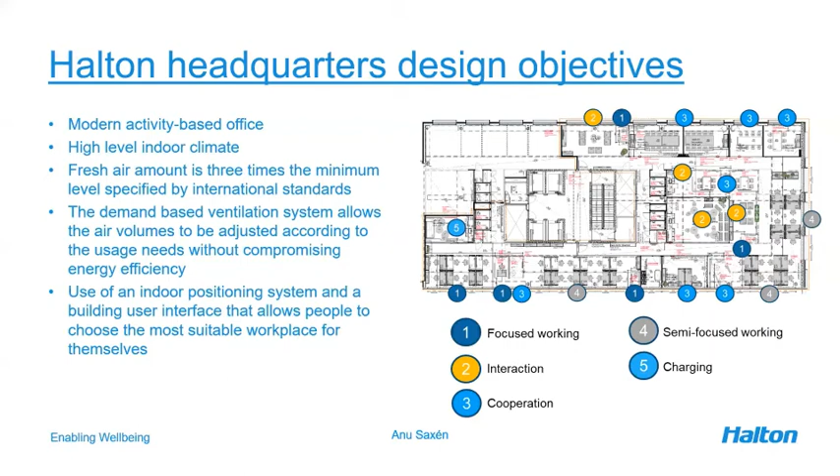We've wanted to enable a smooth workflow in offices through a building user interface, where people can also see the conditions. I'll show in the next slide how it actually looks. The base of the whole system is a demand-based system, to which we have linked this building user interface.

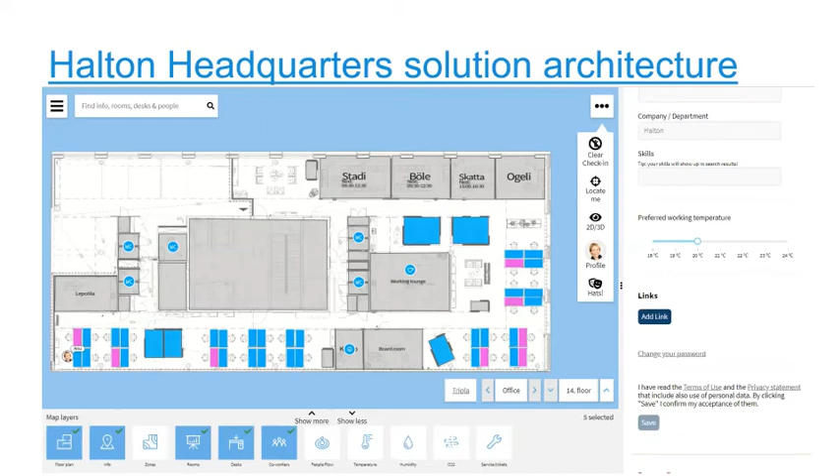People can see quite easily what desks are available, what rooms are available, what the conditions are, and so on. This has actually proven fairly useful now when doing safe return guidance, as we can guide people on what spaces are available and what routes to take.

Going to safe return to offices, I want to share some interesting risk analysis we've done related to the guidance we've given in-house. This is mostly from a ventilation perspective.

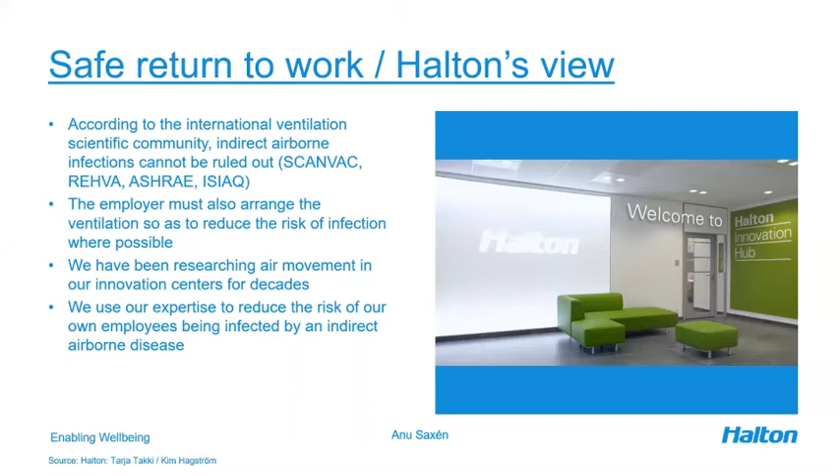According to the scientific community, indirect airborne infection cannot be ruled out, so there's a risk of infections transmitted through air transfer of emissions. From our perspective, we wanted to be a responsible employer and utilize our own knowledge and expertise to reduce the risk of our own employees being infected.

What are the types of exposure to viruses or disease? We have direct exposure, when people are coughing, sneezing, talking, singing, so there are droplets and aerosols transmitted to other people's breathing zone and then inhaled. Then we have indirect airborne exposure, where very small aerosols hover in the air and are inhaled by other persons.

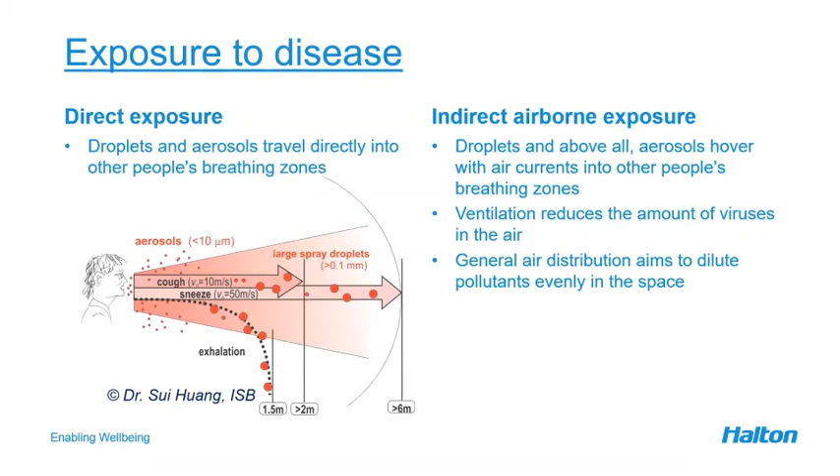Ventilation reduces the amount of viruses in the air, so it dilutes the air. So what can be done, or how can ventilation reduce the risk of infection? Here I'll show some measurements and studies from the risk analysis we've done.

For direct exposure, the key thing is to assess situations where there's a risk of direct exposure, even if we apply the safety distance of 2 meters. We verify these situations with smoke tests, then make necessary changes - in our case, plexi dividers on meeting room tables; air curtains can also be used, along with different seating arrangements.

For indirect airborne exposure, we've done risk analysis of situations where an infected person is in a space, assessing the risk with different ventilation amounts using the Wells-Riley method. We then investigate improvements in ventilation and implement measures. If the ventilation system isn't efficient enough, local air purifiers can also help. The Wells-Riley model basically shows that with increasing ventilation, the risk of infection in a space is reduced.

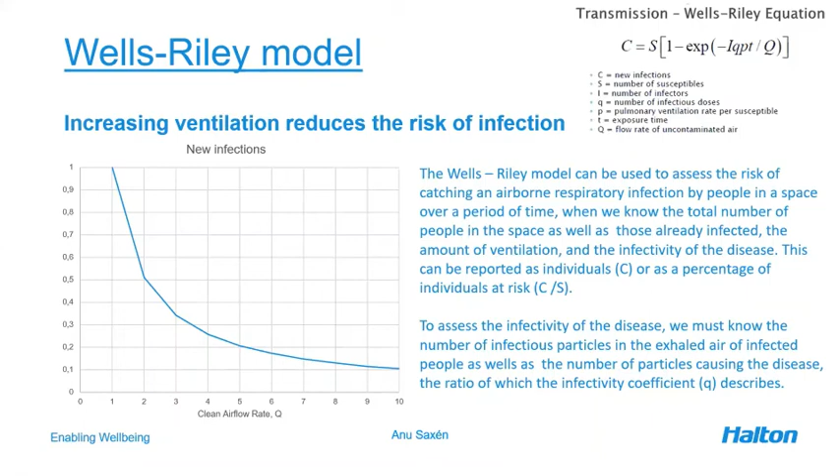Let's look at direct exposure cases first. We have a conference room, and with this analysis we defined good seating arrangements and whether we need any extra physical barriers for the rooms. Let me show you a couple of videos.

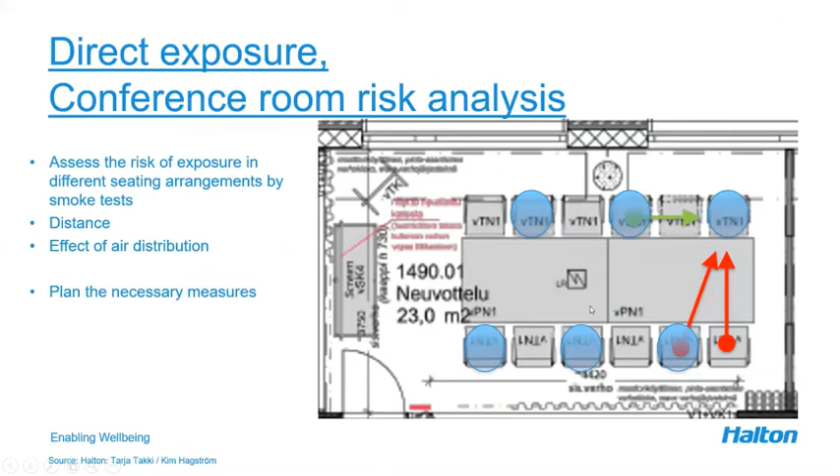This is a case where there's no plexi divider, and you can see how the air moves from the person to the other side. This is shown in the picture on the right - Kim Hagström made these materials with Tarja Takki for us. You can see that it travels quite freely to the other side.

Then we have a case where we have a plexi divider in the meeting room to stop the direct exposure. Now you can see that even though the person is breathing a little bit more heavily, the airflow is not coming to the other side.

So we did the same analysis for open space, a table group of 8 persons, and noticed with the same analysis that the seating arrangement has to be diagonal or directly back to back to minimize the risk for direct exposure.

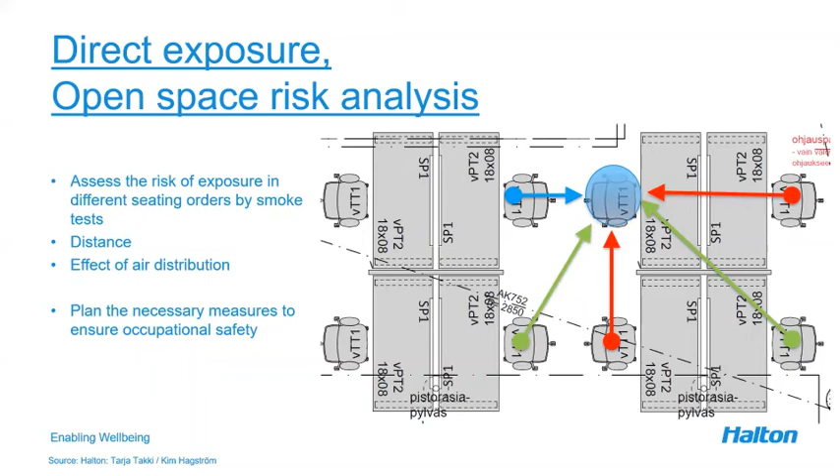To summarize, direct exposure carries an increased risk for infection, and based on that analysis we have applied means like plexi dividers and safety distance, diagonal seating in the rooms and in open plan office.

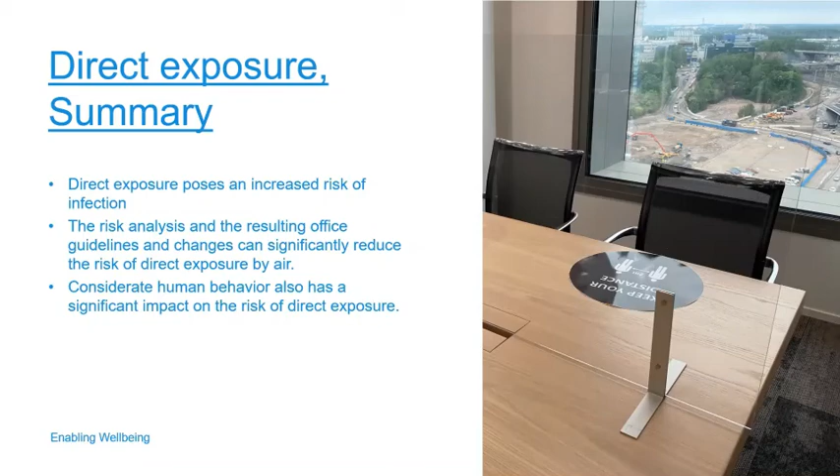Then about indirect airborne exposure. I have 3 cases here: entire office level, open space, and a meeting room. We have 2 cases of normal occupancy and 2 cases of reduced occupancy.

The minimum ventilation case is according to international standards. We used the Wells-Riley model and assumed a 7.5-hour working day. For a 60-person office with 1 infected person, the probability of infection is about 18%.

We can dramatically reduce the risk for infection with normal occupancy by utilizing, like in our own office case, higher fresh air amounts, and further by applying safe return, reducing to 40 people in the office, and then further reducing the risk by adding air purification.

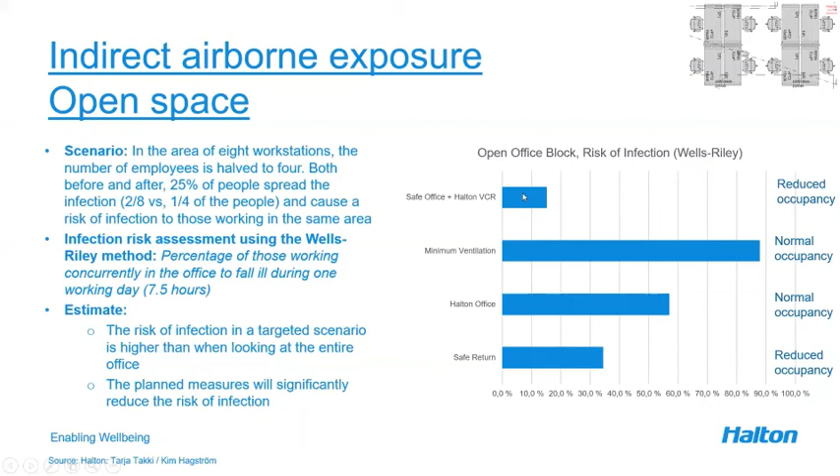The last case is a meeting room scenario, shown in the top right corner. Originally a 12-person meeting room with normal occupancy, the risk of being infected is really high, over 90%, in a case

where there are 2 people spreading the infection. It's considerably lower with our Halton office case with higher air volumes, and further reduced when applying safe returns, having half of the employees present in the office.

Also in our case, as we are utilizing a demand-based system, we can utilize maximum airflows in the meeting room when there are people, so we can further reduce the risk.

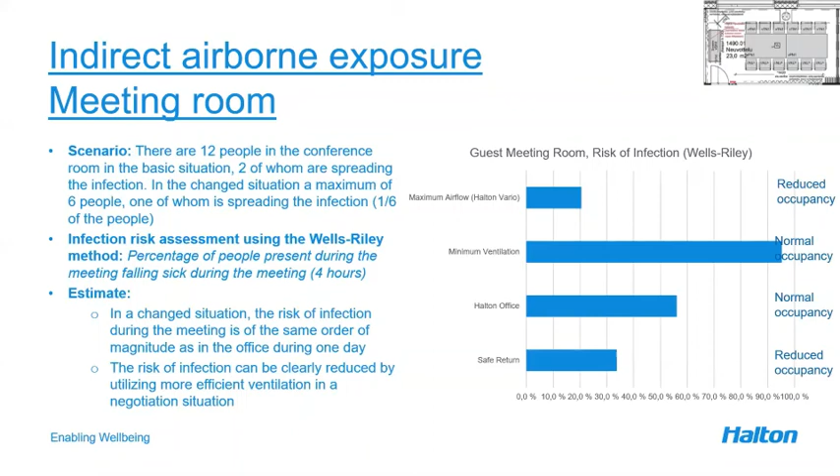To summarize, the risk of indirect exposure cannot be ruled out, and it's good that we have utilized this risk analysis to assess the risk. The risk cannot be completely eliminated, but we can certainly affect it very much by these ventilation measures. Naturally, it's good for the well-being of people, not only as a risk-reducing measure.

So for the participants of the seminar, I would like you to consider how should we actually define what is an acceptable infection risk in workplaces. Should there be such a rule, and then take necessary measures with ventilation?

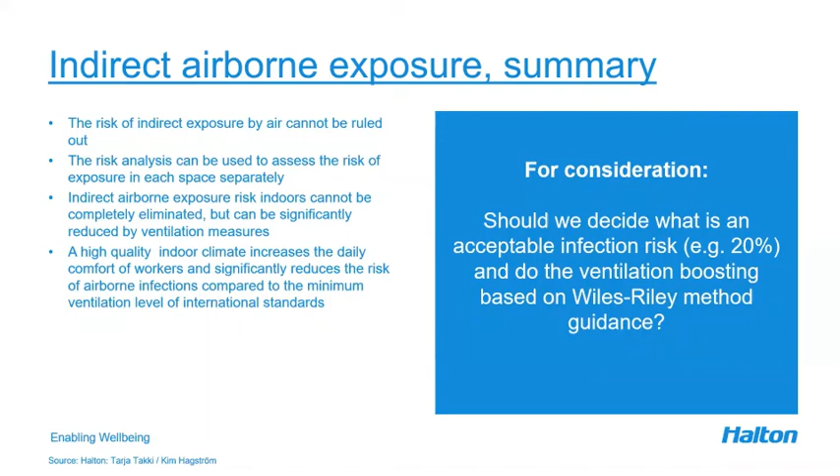To conclude, what kind of practical arrangements based on this risk analysis have we done to enable safe return to offices: in open plan, in the whole office, in open spaces, but also in meeting rooms, we have halved the maximum number of people and applied diagonal seating.

We are enhancing ventilation in meeting rooms during office hours when there are people in the rooms, and between meetings we are flushing the rooms with air. There's a 15-minute period when the space cannot be utilized.

Guests are welcome to meeting rooms, and they are equipped with physical plexi dividers. We also take into account that in the social kitchen area, one person per table group is the allowance. So these are experiences from Halton in

designing workplaces that enhance well-being and safety. To summarize, I believe that when we applied the WELL criteria in designing the space, we had a relatively easy task to then develop very good means for safe return, as the base was already there.